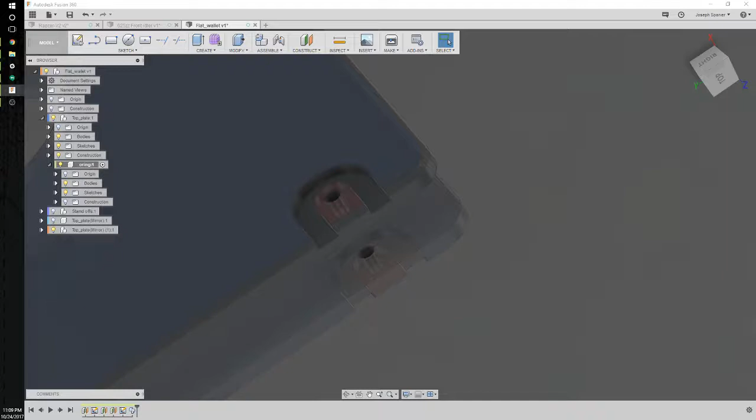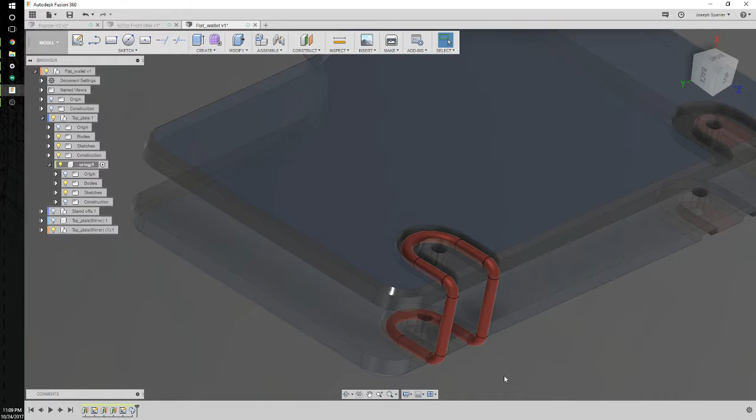Hey guys, I just got done doing a quick tutorial on how to make this flat wallet thing in Fusion 360, and at the end we got to a point where we needed to model the O-rings, and I wasn't quite sure how to do it, so I sat down and I figured it out real quick. And the way I did it was I used 3D sketches and the sweep command to make the O-ring. And it's not quite perfect, but I did get to learn how to use 3D sketches, so I figured I would show you guys how I did it real quick.

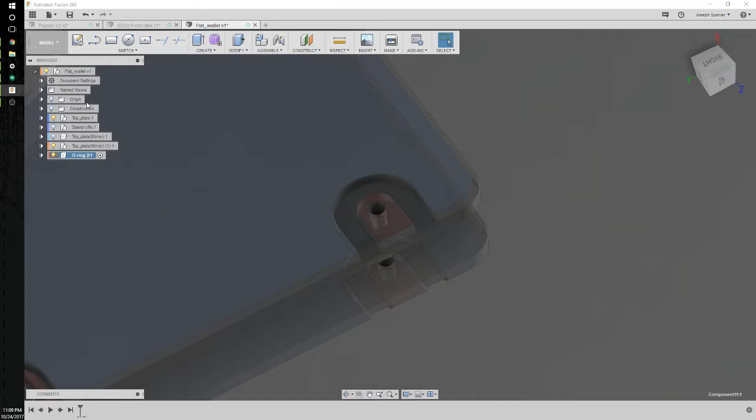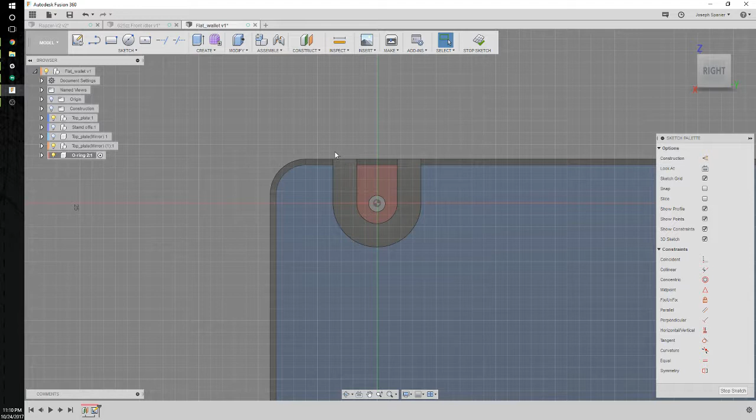So to start, I'm going to make a new component for our new O-ring. And make a construction plane 0.5 millimeters from the top, or from this base here, because that's 1 millimeter deep groove. And go ahead and create my sketch. And then I used the project command. Used P to start the project command up. And go ahead and we'll just project the base of this circle here.

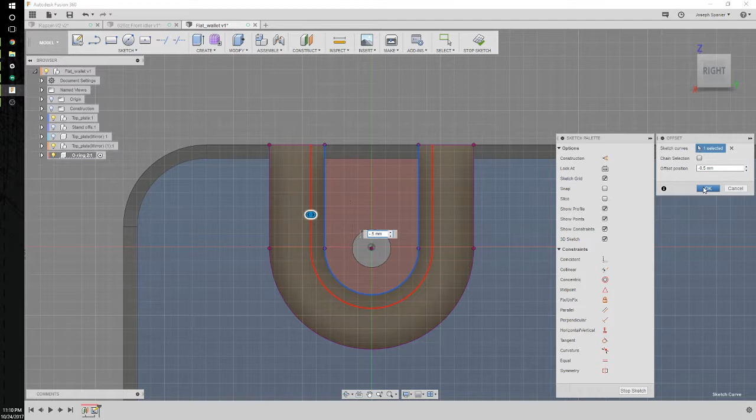And use the O key to start offsets. And I'm going to deselect chain selection because I don't want all of that stuff. And I want to offset it maybe 0.5 because it's a 1 millimeter diameter O-ring. And I'll click OK.

And I'm going to make a construction line out here that is 0.5 millimeters out and extend this. And the reason I'm doing this is when I made 0.5 millimeter line segments out before, when I went to use it for a 3D sketch, it gave me some trouble. So I'm going to try this extend, make this into a construction line so it doesn't interfere with us later.

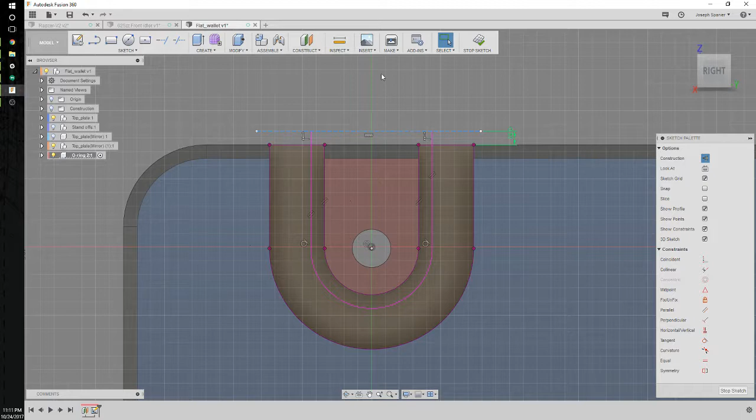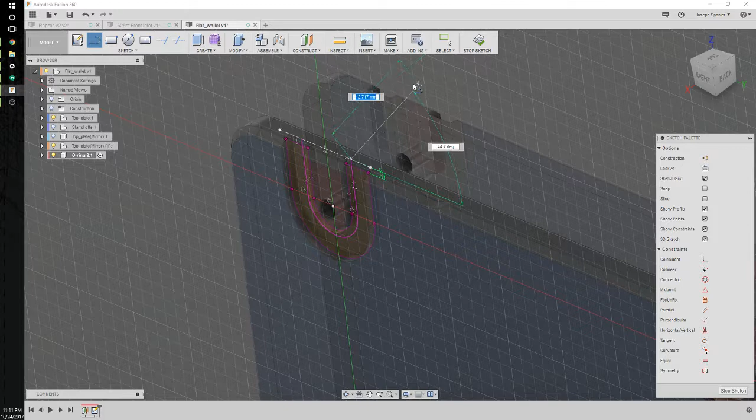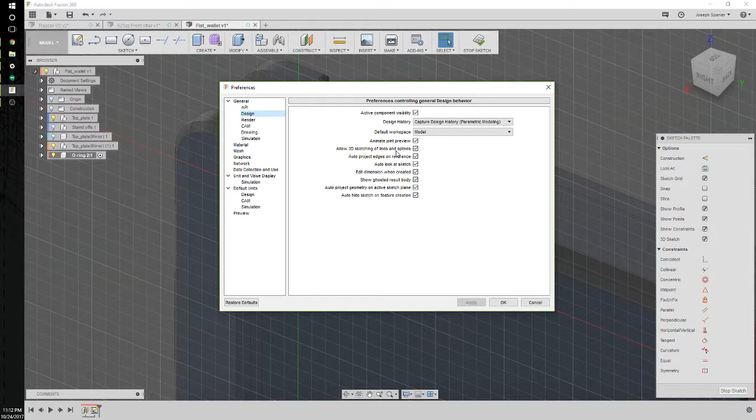And the way I've always understood 3D sketches was I could just turn the model and start drawing this in 3D, but it still constrains me to 2D. So I found a Knowledge Hub post that explained 3D sketches real quick. And what it turns out it is, it's kind of like 2D modified sketches, and not quite 3D sketches like I had in my head. So what I needed to do to enable that was make sure that you go into Preferences and Design, and allow 3D sketching of lines and splines is enabled.

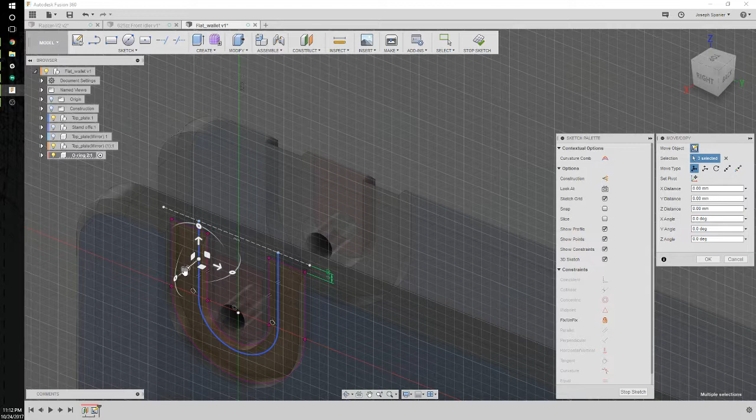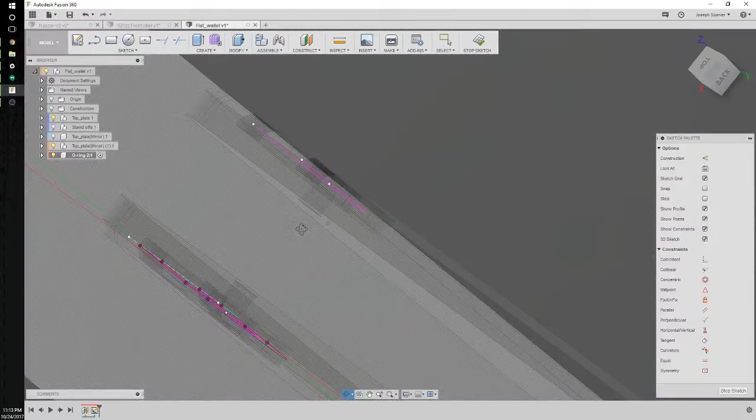And then I can select these lines and right click and copy them. And then I'm going to use Control V to paste them and drag that guy out 8 millimeters, which puts it about halfway in the pocket for the other one. And this now kind of enables, you can see we've got two sketch planes now. That's what it sort of looks like. Or no, one sketch plane still.

But what it does is it enables it so that I can draw a line between these two and use snaps. So now I have a 3D sketch of somewhat of what I want my path for my O-ring to be. I'm going to go into the sketch command and do a fillet. And we'll make it, what's 1.5 look like? 0.5. Make it 0.75. Right click and repeat it.

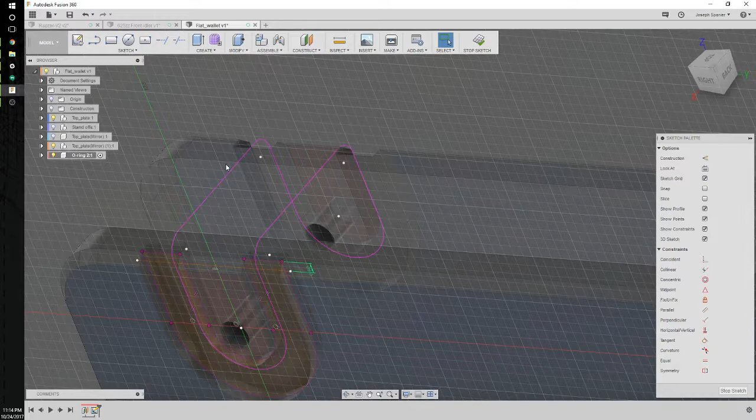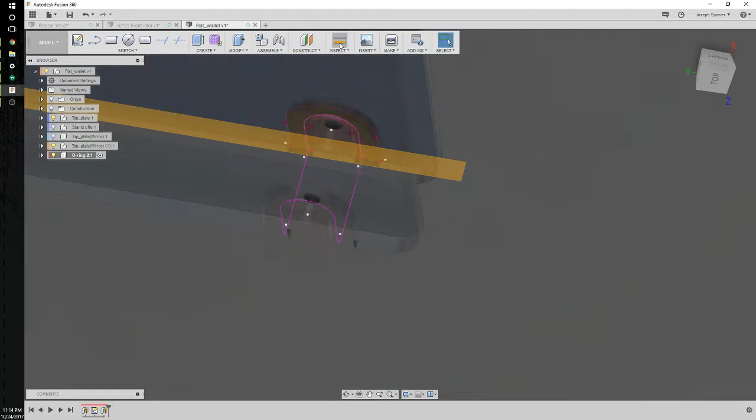Alright. Those warnings it was giving me is that it was breaking constraints as it was doing those fillets. So now I have a really nice 3D sketch as my O-ring path for my flat wallet, which is nice. And then the last thing I needed to do to finish out the sketch was to sweep it. And to sweep it, I did an offset plane about 2 millimeters in, and another sketch on that plane with a center point circle of 1 millimeter.

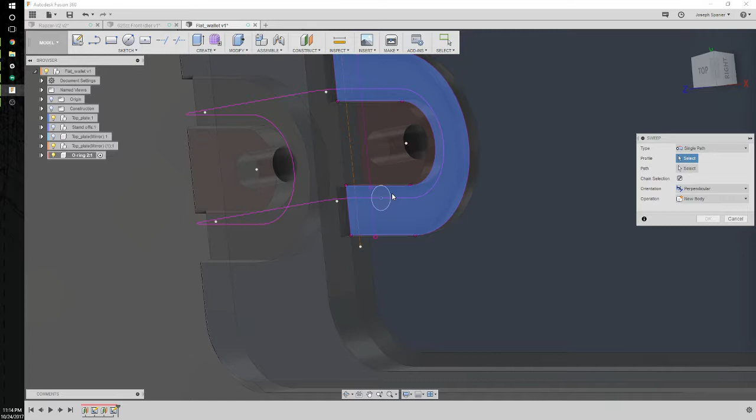And then I was just able to snap that to the bottom of the pocket and go to Create, Sweep, make sure that's what I selected. Use that circle as my profile, use my 3D sketch as my path, and that made me a pretty nice O-ring path. So that's exciting. I learned something new tonight.